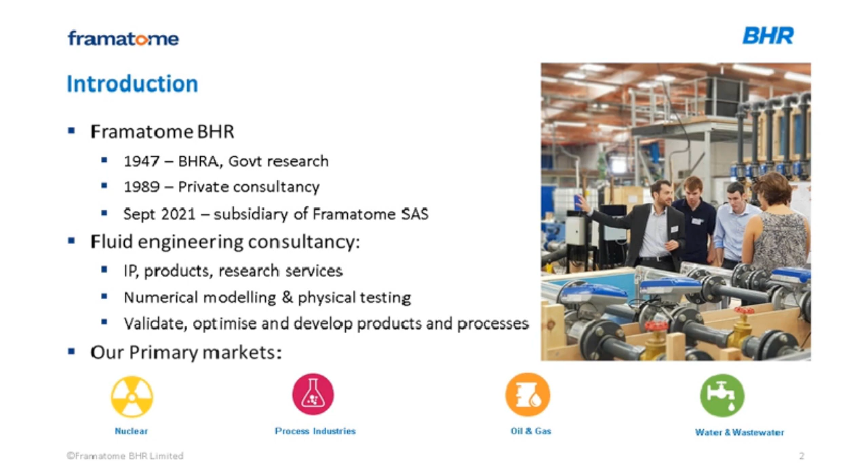Okay, so water and wastewater, in terms of the treatment, is a very big topic. So this webinar is really intended just as a taster for what's possible in terms of modelling, how it can be used to make the process more efficient. It's not intended to be comprehensive. If we get enough interest in this webinar, we can look at a more detailed seminar in due course, if that's of interest.

So with the increasing world population, drinking water is becoming a much scarcer resource. Also, the more people, there's more waste to process, which basically requires greater efficiency in water treatment, so that we can deal with greater flows, use less energy in the process, and use less chemicals. In terms of difference between water and wastewater treatment, we look at water treatment as dealing with drinking water, and wastewater as forms of waste such as from industry, so chemicals. But what I've found is that more often what I've been dealing with is sewage treatment in terms of wastewater treatment.

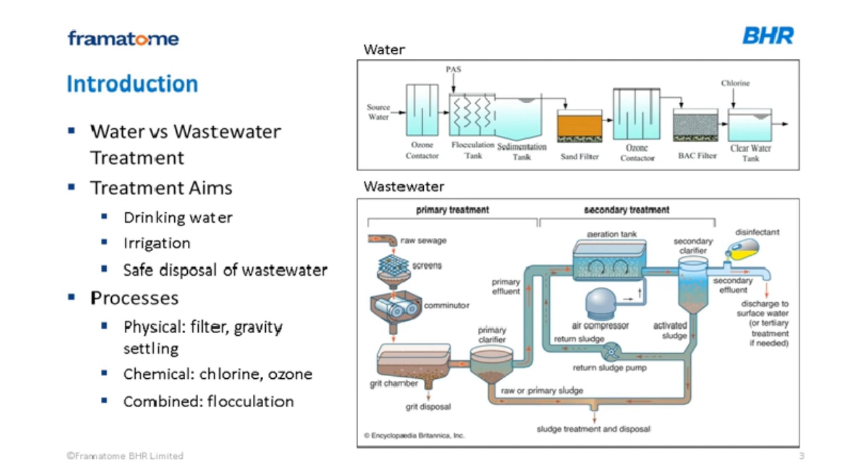And then if you look at the return sludge, one of the things we look at is the mixing of return sludge and the primary effluent. In that process, it needs to be well mixed before it goes into the aeration tank.

Okay, so the first case study, in terms of the modelling we can do, we'll look at a chlorine contact tank. The process is chlorine dosing for disinfection, and what the process is looking to achieve is a minimum contact time for the water to be in contact with the chlorine, to be disinfected to appropriate safe water quality.

In terms of the modelling, we would carry out a base flow, and what you're looking at in the video is a transient scalar being modelled. We implement a kind of pulse signal to start with, so you'd have the initial scalar put at 1, and then after that at 0.

What you can see in the video was the propagation of the scalar going through the model, and in terms of the curve that's been modelled, you see the concentration modelled at the outlet, and that's how we calculate or determine the residence time distribution.

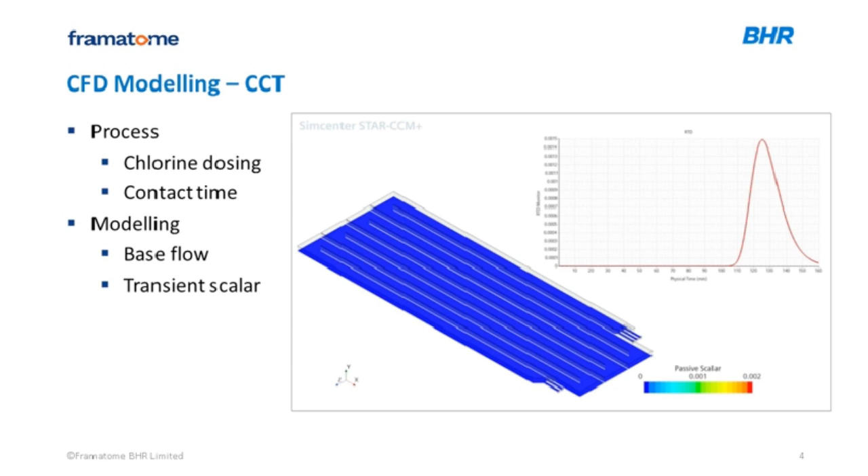You can see here we've got different residence time distributions for different numbers of channels. In terms of the efficiency of the chlorine contact tank, what you're looking for is to be as close to plug flow as possible, so that you've basically got a consistent velocity throughout.

In terms of a perfect efficiency, you'd look at basically a really sharp spike in the middle, so basically all of the fluid exiting is exiting with the same age. That's kind of perfect efficiency.

In terms of contact times, we can look at either so-called T5 or T10. T5 would be the time for 5% of the inlet water to flow through to the outlet, T10 is the 10%. We can look at the plug flow factor, which would be T10 over tau, where tau is the nominal contact time, determined by the flow rate and the volume of water in the tank.

In this case, you'd be looking for a perfect efficiency approaching 1, bad efficiency is 0, and how we would assess it kind of depends on what I've been given. It can be that greater than 0.7 or greater than 0.8 is acceptable.

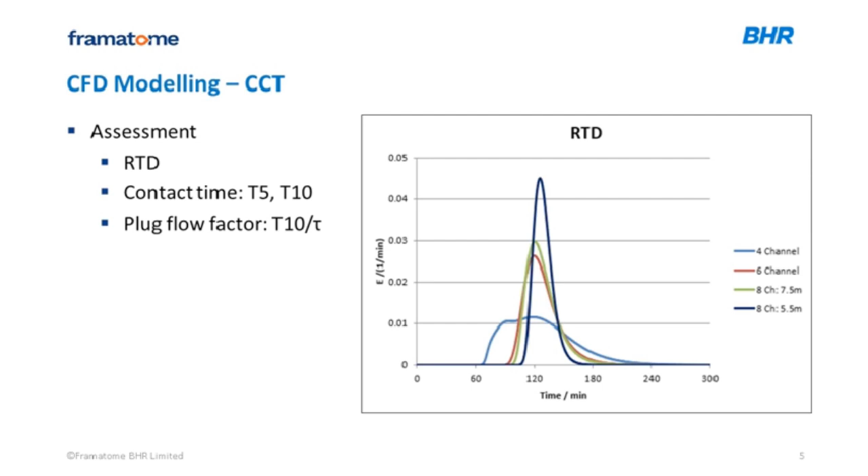In terms of mitigation to improve the residence time distribution and improve the contact time, we can look at reducing dead zones and reducing short circuiting. Here we're looking at the underlying flow velocity contours, and you can see a big dead zone next to the inlet. So what we could look at doing is using flow straightening devices, for example an orifice plate.

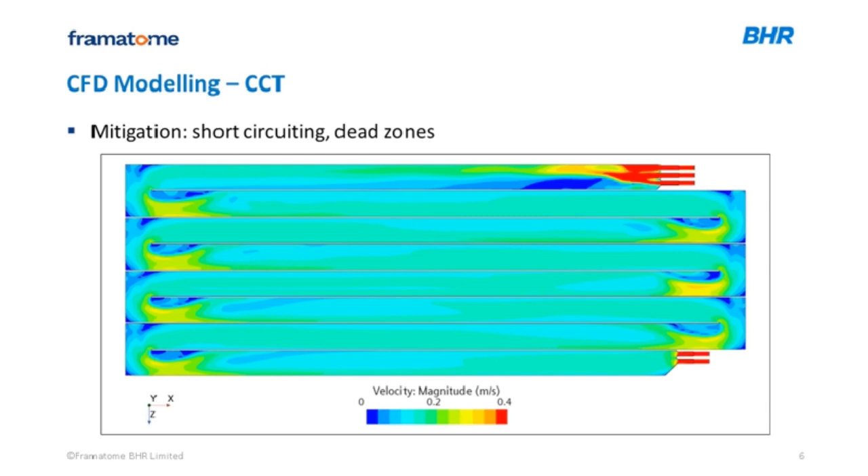Also, you could look at filling in the bends. One interesting thing we found in this study was if you look at the gap between the baffle and the wall on the left and right-hand sides, it was found that a gap slightly less than the actual channel width was better for plug flow efficiency.

Okay, so the next case study, I'm going to look at mixing generally, but with regard to return activated sludge. I mentioned that in the introduction slide to the wastewater treatment. This would be in an anoxic zone before putting into an aeration tank.

You can see on the right-hand side we've got a pipe for the influent, and a couple of pipes for the RAS, the return activated sludge. In terms of modelling aspects, we have an impeller for mixing here, so we can look at a kind of quasi-steady state analysis using the MRF, the multiple reference frame method.

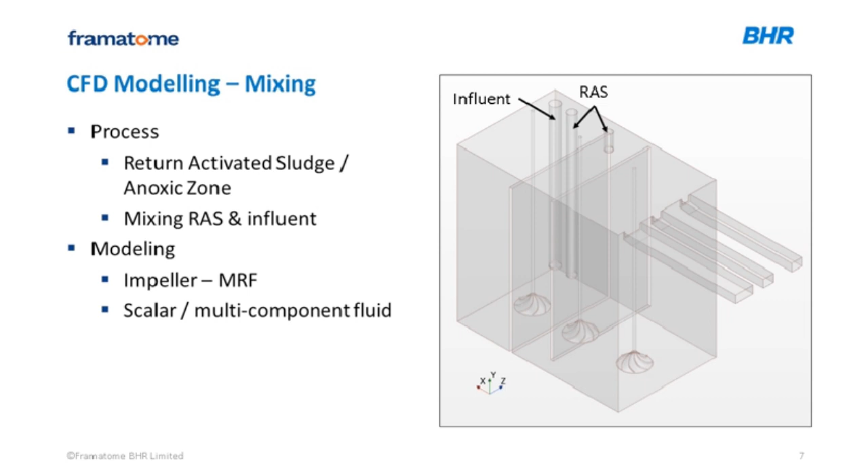In terms of the fluid properties, if what you're trying to dose has the same properties as the bulk fluid, then you can use a scalar. In this case, the RAS has sufficiently different density and viscosity to mean you need to model it as a multi-component fluid with different fluid properties.

In terms of assessment, on the right-hand side you can see a plot of the mass fraction of the RAS, the concentration. The red is where the RAS is coming in, the blue is where the influent is coming in, and you can see gradually as it goes through the system it becomes more consistent, turning green.

Now in terms of an assessment of mixing, we look at the coefficient of variation, COV - that's the standard deviation of the RAS concentration divided by the mean RAS concentration over a particular surface. We'd look at a cross-section, perhaps at the underflow baffle or at the outlet, to see what the COV is there. For the best mixing you're looking for as low as possible - a COV of less than 0.05, or 5%, is very often used as the industry standard for acceptable mixing.

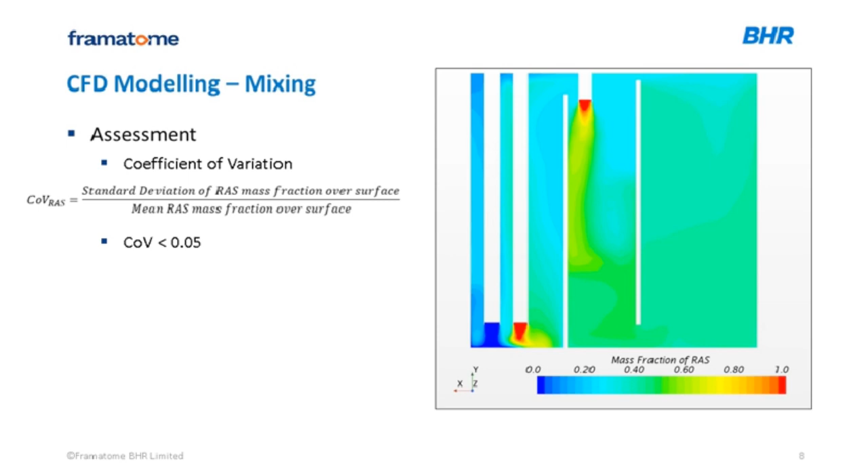Okay, so we can also look at settling tanks. This process is to do with gravitational settling. In terms of modelling, the things you need to think about include solid-liquid multiphase modelling for your solid particles, and you need to model hindered settling, which accounts for the difference in how particles settle out due to interactions when it's more concentrated.

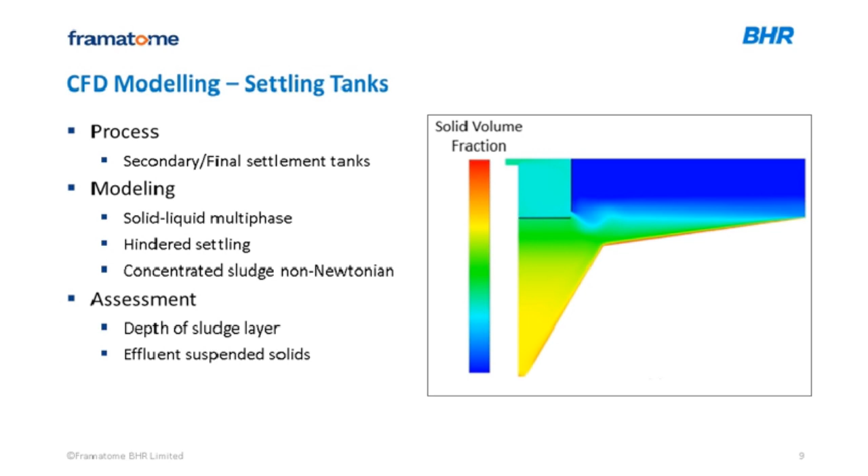So in terms of an assessment, you're looking at the depth of the sludge layer, and you're looking at the amount of suspended solids in the effluent that's disappearing over the weir, as I talked about.

So finally, for the computational modelling, we'll look at pumping station assessment, and what we model this against is the ANSI HI 9.8 design code. A couple of things to point out - I've noticed more and more people, more and more companies, asking for a CFD assessment of pump stations.

It should be noted that in the latest version of ANSI it is still advised that you should use physical models. In particular, computational modelling is not as good as physical modelling in dealing with air entrainment. At the moment, and I'll show you in a couple of slides' time, the CFD modelling can give an impression of whether there is vortex activity, but it certainly can't give the specific classification according to the ANSI standard that Yoav is going to talk about more going forward.

In terms of things to think about modelling, you can see in this video we've got water levels at different heights, which brings about cascades, and you can see in this case lots of surface turbulence and some air entrainment happening.

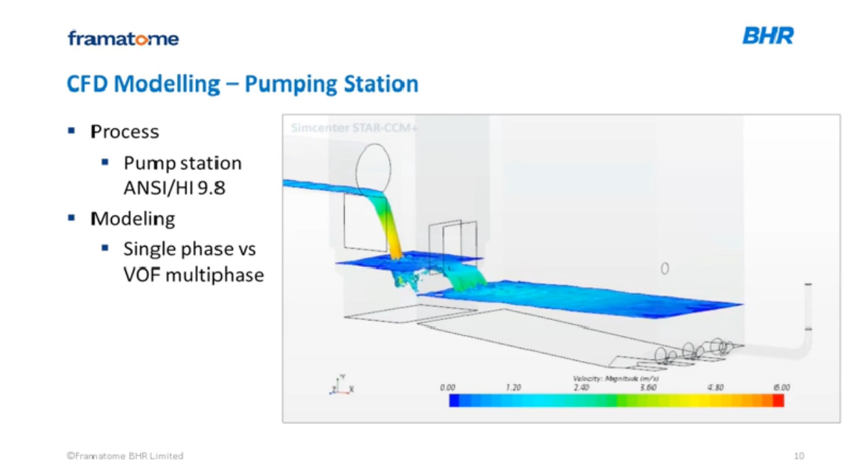If you have a case where there are significant changes in water level, then it's required to do a multi-phase model to capture the surface interface, and you can basically see that from the pump water levels and estimated levels throughout the system. If the levels are planned to be the same throughout, then you can use a single phase model and just use a fixed surface to model the water level.

In terms of how we do an assessment of the pump station analysis, the first thing we'd look at is the swirl angle. The swirl angle is defined by theta, the inverse tan of the tangential velocity over the axial velocity at the pump impeller position. This would be without any actual impeller modelled, but just at the position where it would be.

So you can see on the right hand side a plot of the tangential velocity. In this case, it's quite consistent, the tangential velocity acting all in one anti-clockwise direction, so this would result in quite significant swirl.

In terms of the ANSI standard, swirl of less than 5 degrees is required, or it's allowed to be up to 7 degrees for infrequent operations, so less than 10% of the time. But if you're looking at a steady state analysis, say with a single phase, then you're going to want it to be less than 5 degrees.

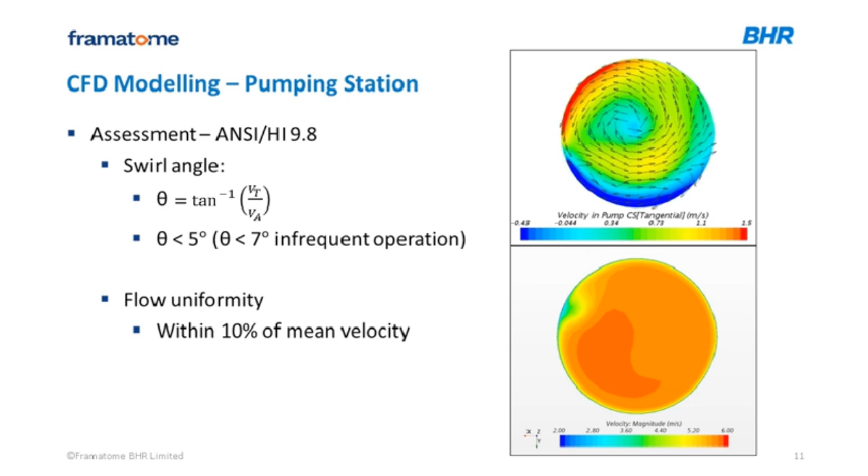What we can also look at is an idea of vorticity. On the right hand side, using the Q and lambda criterion, we can get an idea of subsurface vortices. The bottom right image is obtained from looking at streamlines, and you can see this kind of tornado-like structure going into the pump bell mouth - obviously an indication of surface vortices here.

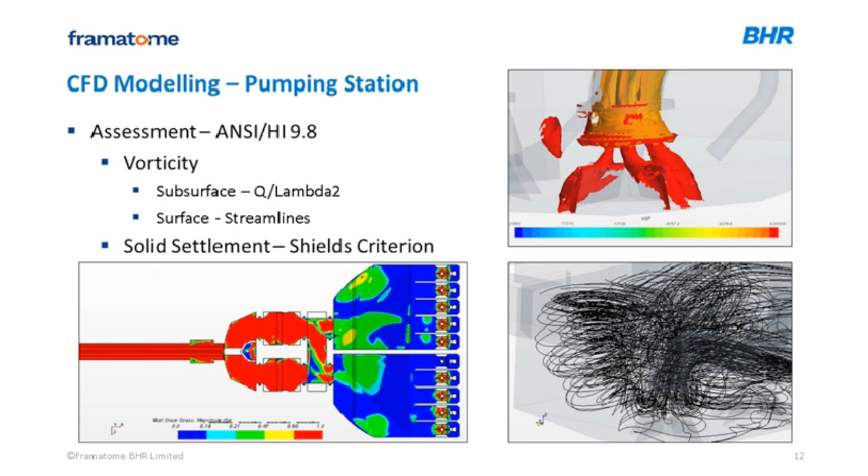We can also look at solid settlement using the so-called Shields criterion. The Shields criterion looks at the wall shear stress, and it has a critical wall shear stress for different particle sizes. For example, if you look at this contour plot on the bottom left-hand side, the blue area is a very low shear stress, so basically all particles, any size, will settle out. Going up towards red, only particles over a certain size will settle out. So you can see from these contours the idea of which size particles will settle out.

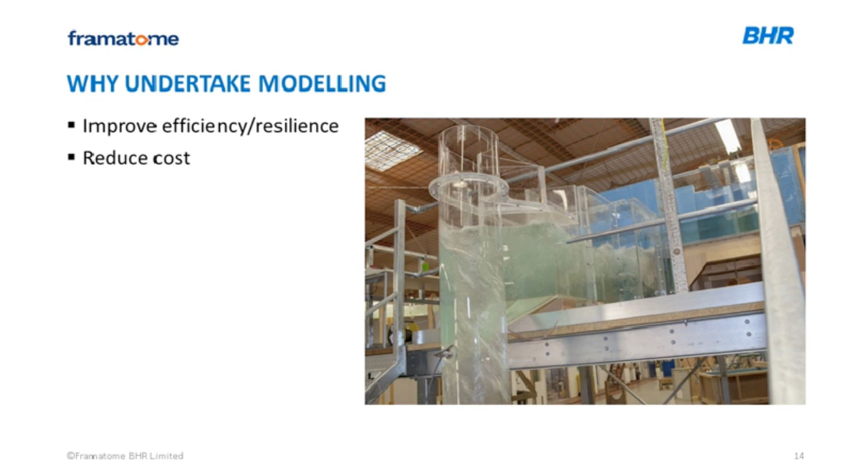When I'm talking about physical modelling, I'm going to focus on pumping stations specifically, but we do model other infrastructure, things like vortex drop shafts, inlet works, and also dams. So a wide variety of infrastructure we can model, but I'll focus specifically on pumping stations because that's where a lot of the interesting measurements we take are found.

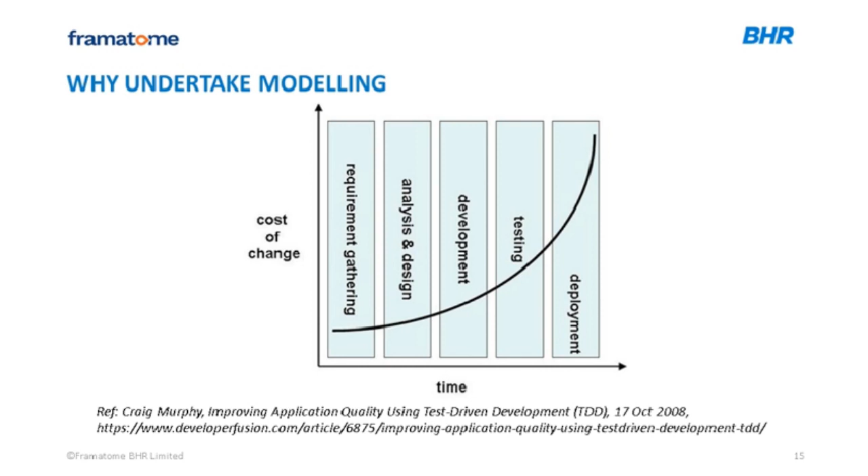So what are the advantages of a physical model as opposed to CFD, or vice versa? Of course, CFD is substantially cheaper - you're not having to build a large or small model.

So you haven't got a long initial build of the model. And if you want to make a big change to your design, it's not so difficult to do. And it's easy to extract data because you've got all the data there in your computer model, and you can look back at it later because you can save your files.

However, for a physical model, depending on how it's set up, a minor change to design, for example a baffle in a specific location, can be quicker to test because all you have to do is put in a piece of wood and hold it there and see what it does. And it's easier to test different operating conditions by changing your pumping, adjusting valves or which pumps you're operating in the model, without having to rerun the simulation.

And as Nick's also touched upon, things like modelling vorticity or vortex activity and air entrainment can be more accurate in a physical model than in CFD.

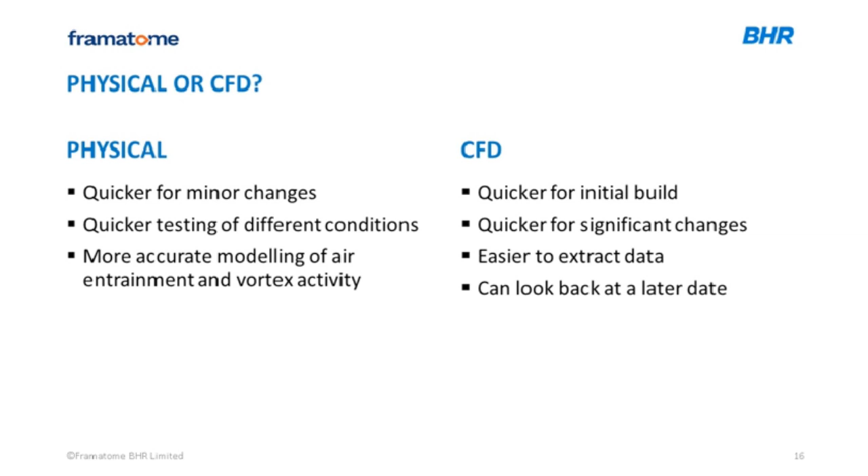So when we're scaling a physical model, we obviously don't want to build our design at full scale because our laboratory is not big enough to have a 10-metre tall pumping station. So we want to scale it down. The scaling criteria we use is a Froude scale model. We want to maintain equality of the Froude number between the full scale and our model scale when we are scaling it down. The Froude number is the relationship between the velocity and gravitational effects.

The advantage of keeping this the same is that our geometry scales geometrically. So for example, if we have a scale factor of 1 to 7, what in the full scale is 7 metres will be 1 metre in our model. And that makes water levels much more easy to measure.

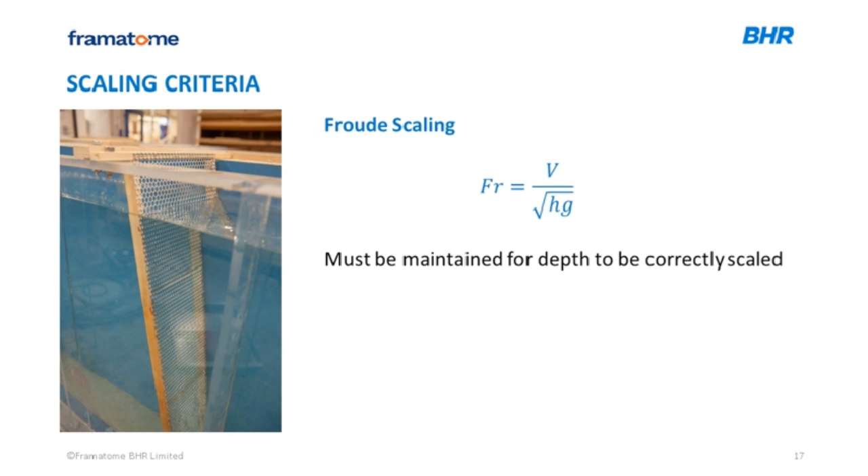However, by maintaining the Froude number, other parameters are varied, not necessarily to the same scale factor. So the velocity is actually scaled to the square root of the scale factor, flow rate to the power of 2.5, and Reynolds number to the power of 1.5, which means that when we are setting up our test conditions and looking at pump flow rates etc, it's not just a simple relationship by the scale factor. We actually have to take it to the power of 2.5, which does make a significant difference.

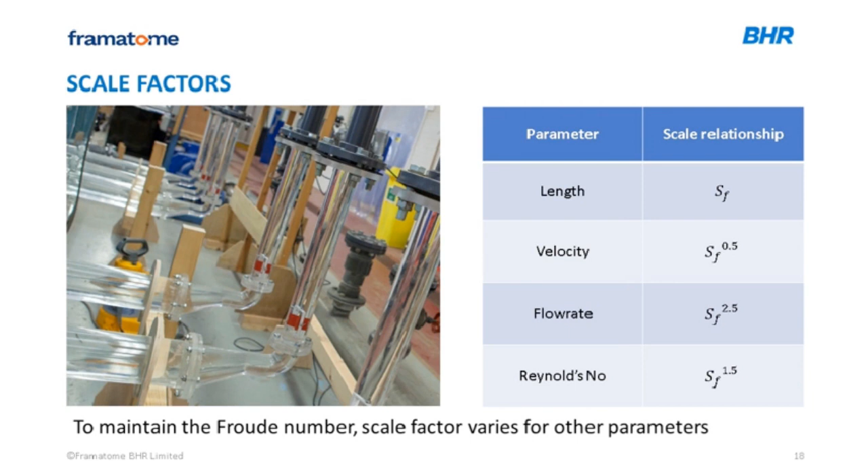The other relationships we need to look at are the Reynolds number and the Weber number. The Reynolds number is the relationship between inertial effects and viscosity effects, and essentially it defines whether the flow will be turbulent or laminar. As we reduce the scale factor, although Froude number is maintained, our Reynolds number does reduce, and again that's to the power of 1.5 of the scale factor.

This is usually the limiting factor to how small we can make a scale model, because we need to ensure that the flow characterisation is still turbulent, to make sure we are representative of what will happen in the full scale model. So as we reduce our model size, the Reynolds number will reduce, and we need to keep that Reynolds number high enough, usually as per ANSI in the order of about 60,000, so that we are still in the turbulent regime.

The Weber number is also another number which you need to keep higher. We're normally looking for a Weber number of about 120. This is a relationship between velocity and surface tension. So when we're looking at air entrainment, to make sure that any air bubbles are more accurately modelled, you want to make sure that the Weber number is high enough so that we can more accurately measure air entrainment.

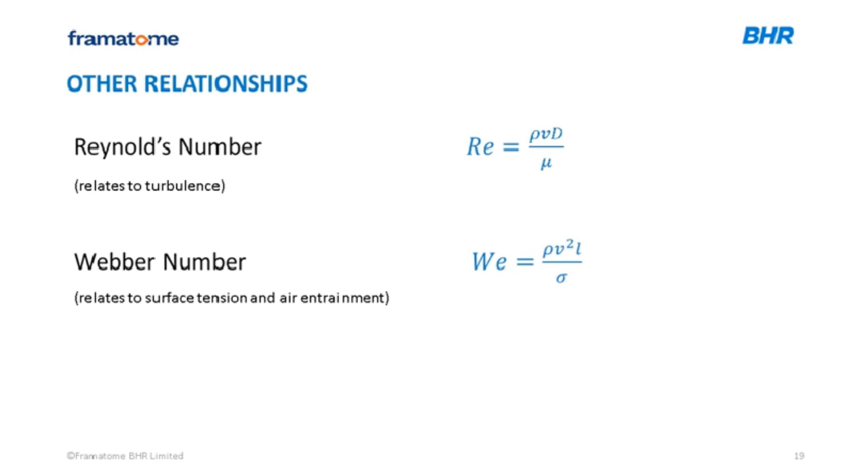So once we've scaled the model, there are various parameters you'd like to look at. In a pumping station, one of the key things to look at is pump swirl. We measure pump swirl using a 4-vane vortimeter, which should be in the position of the pump impeller. You can see in the video here an example of a relatively high pump swirl, and you can see the vortimeter is spinning around nice and quick, or not nice and quick as the case may be, because you don't want it to be such a high swirl.

A high swirl is essentially having rotational flow going into the pump. Pumps are designed ideally so that the flow is coming in nice and straight when it approaches the impeller. In reality, because of the conditions within the pumping station, it can come at an angle and have rotation going in. If it's rotating in the direction of the impeller, the flow is already rotating as it hits the pump, and that's going to reduce your pump efficiency. Conversely, if it's rotating against your impeller, that's applying an additional torque onto the shaft, which again is not good for the pump. And of course, if it's varying, you're going to start getting things like vibrations.

So a high pump swirl can reduce your pump efficiency, it can require increased need for maintenance, it can reduce the pump's operating lifetime, cause vibration, a whole host of issues which can affect your pumps, and ultimately will increase the operating cost of the station if you're having to shut down for repairs, or if your pump lifetime is reduced.

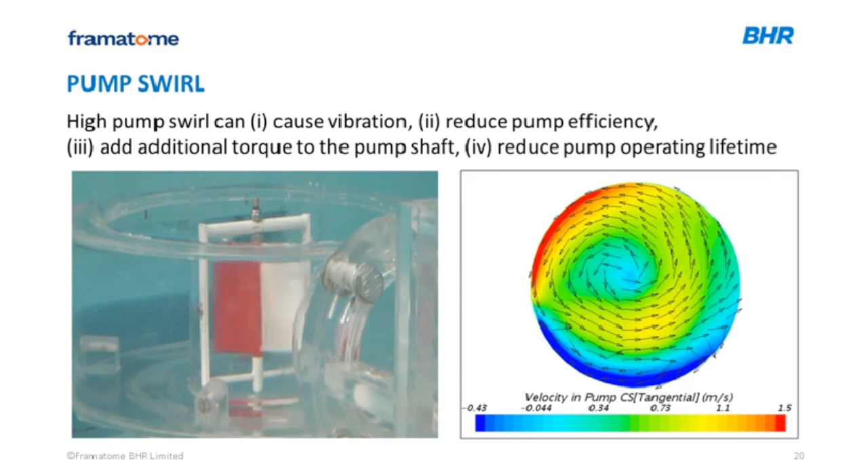Other things you look at is air entrainment, and that's quite easy to see because you can just see the air in the model. We specifically build our models out of perspex so we can see inside and see what's going on. This is quite a severe example of air entrainment, where you've got a free cascade entering into the wet well, quite close to the pump, and you can see the air just being sucked straight into the pump, and you can see in the discharge line the air going straight up into your system.

One thing to bear in mind is that because the Weber number isn't maintained, the air entrainment isn't 100% accurately modelled within your physical model. So you do always need to be extra cautious with regards to air entrainment. In this example here, you can see clearly the air is getting sucked into the pumps. But if the air was not going into the pumps but getting quite close, we would still regard that as being an issue, because we are slightly underestimating air entrainment.

The advantage of a physical model over CFD is that air is much easier to model in a physical model because you can physically see it there. Whereas to model air entrainment, and especially small bubbles in a CFD model, requires quite a complex multi-phase simulation.

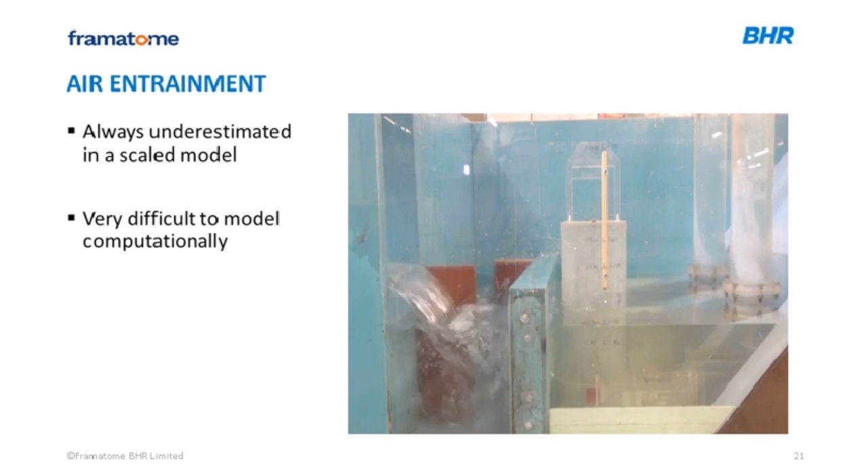Another thing which Nick mentioned earlier is about vortex identification, which, as he stated before, in the CFD model it is quite difficult to identify the severity of a vortex. This diagram here is an extract from the ANSI standard of how we define a vortex in a physical model.

So you've got surface vortices which have 6 classifications, from a minor bit of rotation on your liquid surface to a full air core where air is being sucked from the surface directly down into the pump, similar to how you would see if you had, for example, pulled a plug on a bathtub, where you see an air core down into the plug hole. And you've also got intermediate levels where you've got a distinct dimple which can enter the pump, or you can have solids being pulled down as well.

And you also have subsurface vortices as well, stemming from a wall or the floor, where again you've got 3 classifications, from just general swirl and rotation to a dye core, and in the worst case you can actually have air being drawn out of solution from the water and being sucked into the pumps.

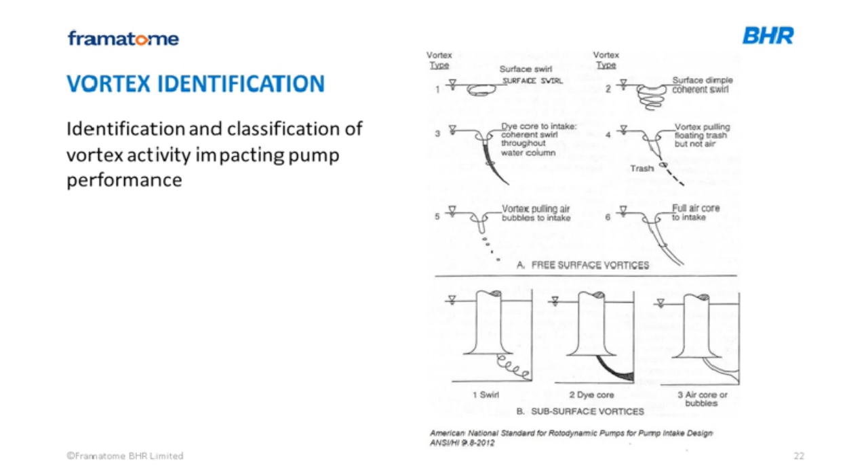The vortex is essentially a point or a stream of low pressure. So in the centre of your vortex, your water pressure is much lower due to the increased velocity, and at that low pressure you can either suck air from the surface, or from a subsurface vortex you can significantly reduce your pressure so the air comes out of solution and into the pump, which causes the same issues of cavitation.

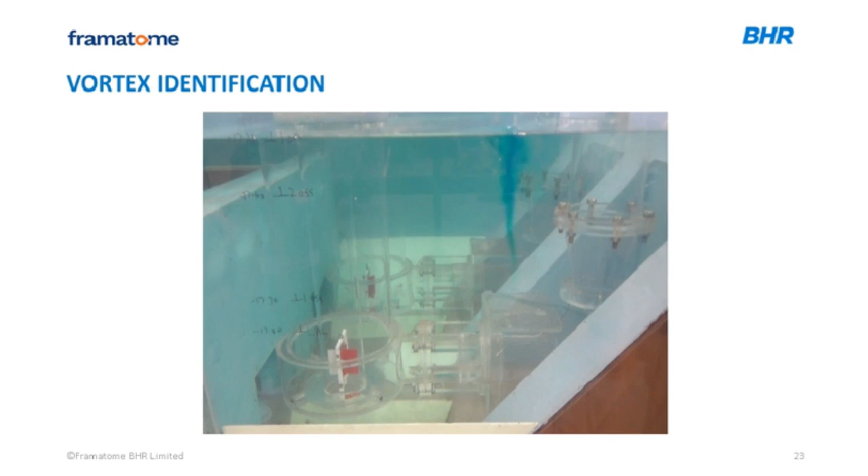So this video gives an example of a surface vortex you can see. This is type 3, and you can see we add dye to the liquid surface, and the vortex just pulls it down the core and goes straight into the bottom of the pump. You can see actually the swirl in this pump is very low because the vortimeter is pretty much not moving. However, you can see the vortex is entering the pump.

As the dimple or the vortex core hits the pump, you essentially have a point of low pressure, and as each impeller blade passes that point, you can get fatigue on the impeller, it can cause vibration, and again it's going to start causing damage to your pumps.

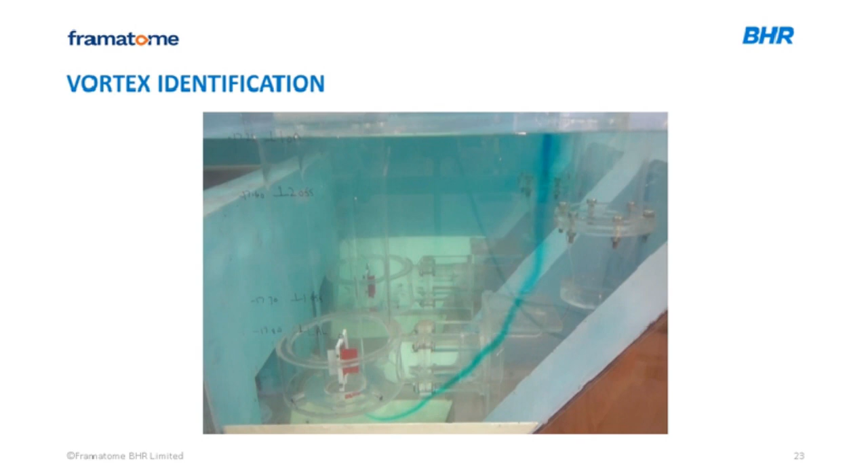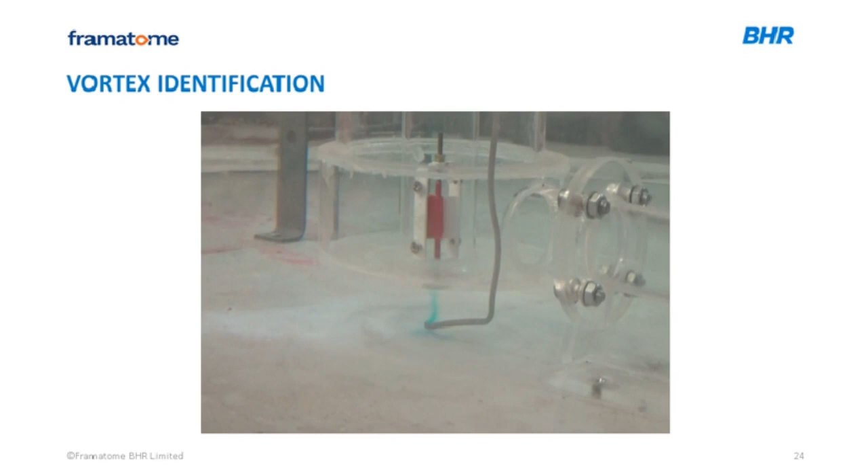Here's an example of a subsurface vortex then from the floor beneath the pump. First of all, you can see how fast the vortimeter is spinning again, so you've got high swirl, and your dimple is going straight up into the pump, and again going to cause the same issues as we had before with the surface vortex.

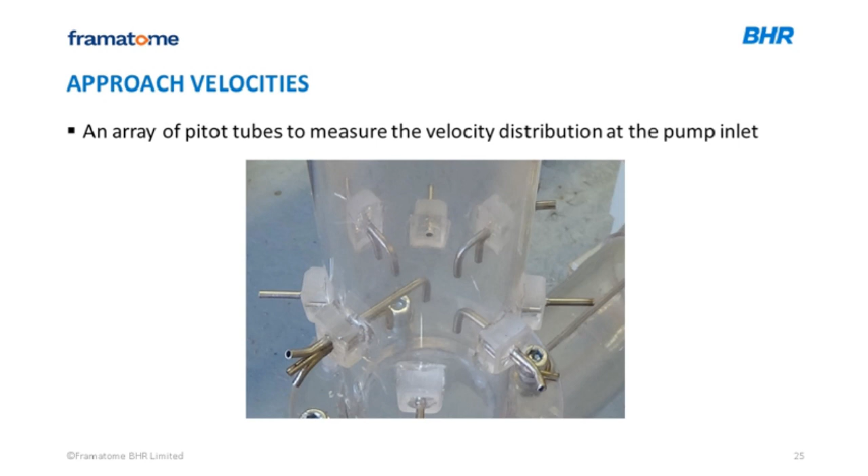Another aspect which we look at is the approach velocities to the pump. In this example we use an array of pitot tubes to measure the velocity profile at the position of the pump impeller. As I said before, pumps are designed for a nice uniform flow to hit the pump impeller head on. So this arrangement measures at 9 different points what the velocity is using a pitot tube. Here's an example of one which was measured on a model we undertook a few years ago.

Normally we're looking for all your velocities to be within around plus or minus 10%.

Other factors which we look at are flow velocities to screens using velocity probes. We look at water levels by measuring the water level in the model. We use a manometer tube and a stilling well to measure the water level more accurately, and we just use dye tracing to look at generic flow patterns as well within the model.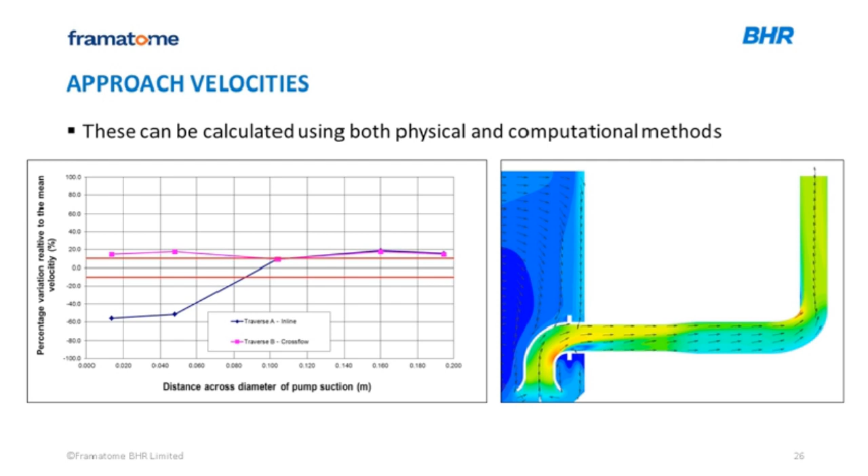So just a case study of a model which we've undertaken recently. This is the Prioress Mill, a river offtake pumping station where we're extracting water from a river at Prioress Mill, which is in Wales. The original design had 6 pumps, so 4 large pumps and 2 smaller pumps, with flow coming from the river.

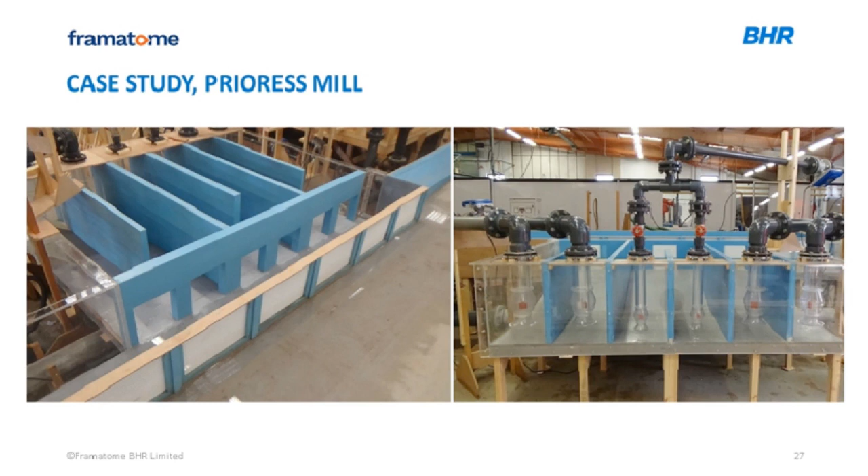The original design had significant issues. You can see in the video we had quite a narrow penstock opening to each pair of pump bays, which resulted in a significant drop in water level, generating air entrainment, and that air was carried towards the pumps. Also, because you had a single penstock for 2 different pumps, you essentially had an asymmetric flow approach to the pump bays, which resulted in significant rotation.

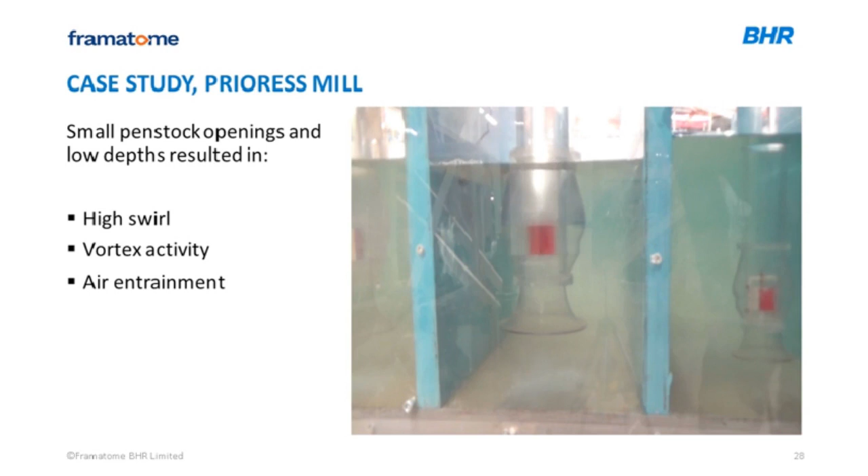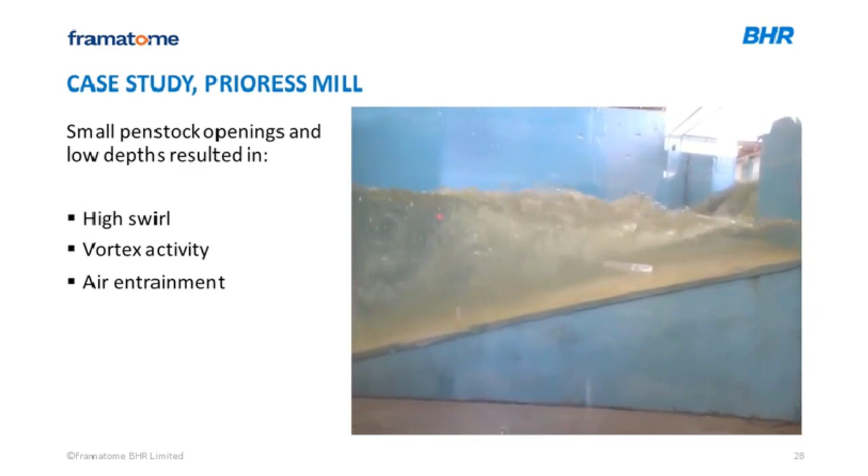So you can see we've got subsurface vorticity, this is at a low level, high swirl, and also surface vortices with the cores going straight into the pump as well, again a high swirl. So pretty much everything that could be wrong with this model is causing issues. You've got vortices entering the pumps, high swirl, air entrainment. This is going to have a significant impact on your pump operating lifetime, your pump efficiency, and the overall cost of running the pumping station.

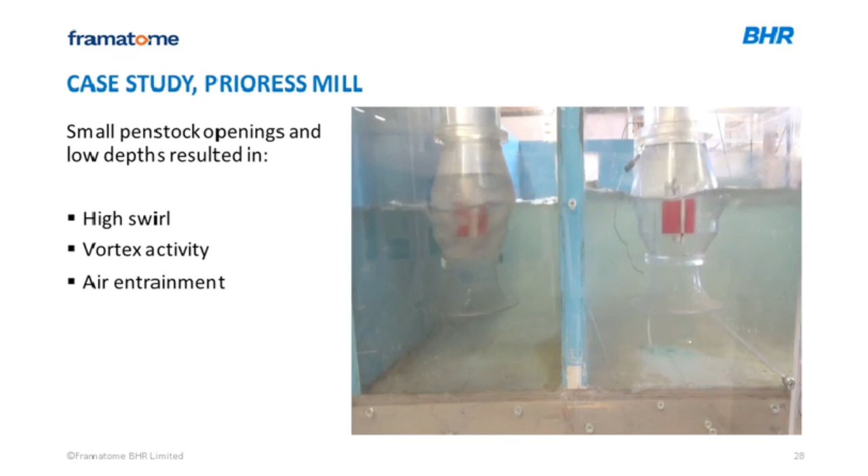So to reduce these effects, we had to lower the pump forebay so you didn't have such a large drop in water level going into the pumps. Where you previously had quite a steep slope coming down to the pump bays, that slope was reduced, and we increased the penstock opening sizes, so we had individual penstock openings for each pump bay, significantly larger, so again you don't have that drop in water level.

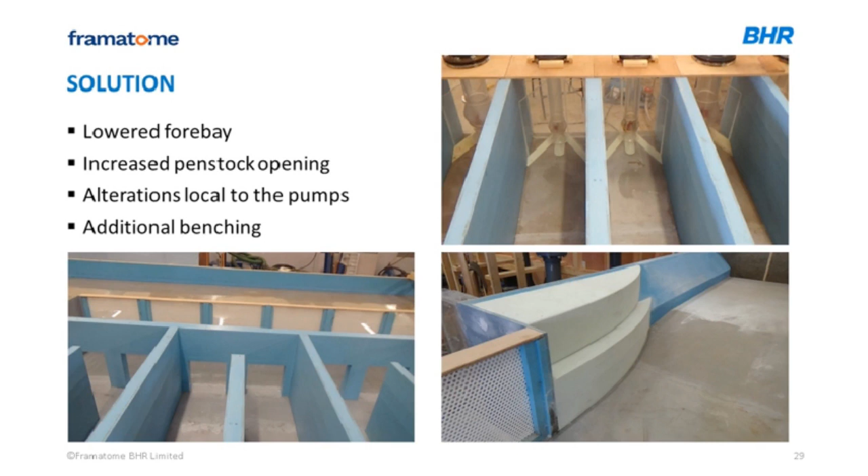And we put local baffling and benching around the pumps to mitigate against the swirl and vorticity. That essentially significantly reduced our pump swirl and prevented any vortex activity as well. We didn't have such a large drop in the water level going in. These modifications in our model were quite substantial and took quite a few weeks to build, which shows how important it is to model things early, because if they'd already built the station and had to rebuild it out of concrete, it would have been a much higher cost than just modifying a scale model.

So just to conclude, both physical and CFD modelling will identify and resolve many adverse hydraulic effects, whether it be a pumping station or a different infrastructure type. It will negate the risk of a non-standard design, because your model can model whatever design you want, so you might have a limitation on site which means you can't use a standard design. And of course, especially early modelling can result in significant improvements in efficiency of your pumps and your infrastructure, which ultimately results in significant cost savings.